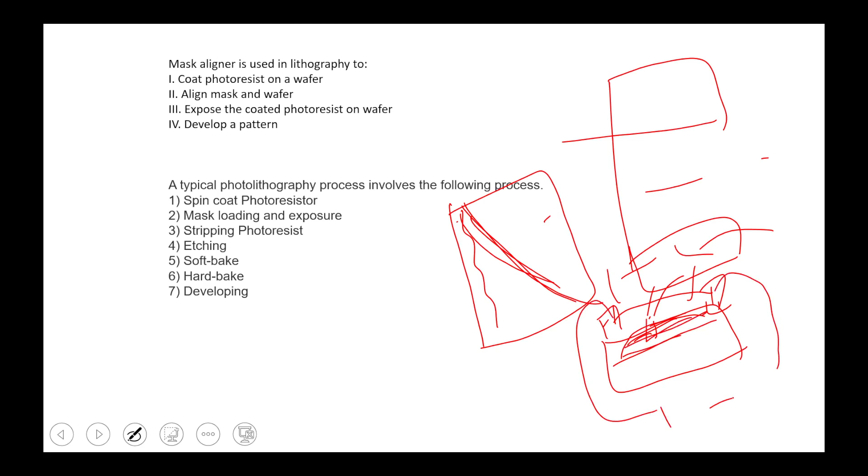We have two electrodes here, and when light falls on these channels, the electron and hole pair in the material will move through this channel and get collected on one path, an electric path, and we have to give the current like that. This is my characteristic, and without exposure my current is like that, suppose 10 nanoampere.

When light falls here on the material, my current will increase like that. It means the electron and hole pair moves from the valence band to conduction band, and it will saturate at one place. Then when we switch off the light, it will again come back to the baseline, same current as before.

What is the increment of current? Suppose this increment is 50 nanoampere here. So the difference, we have an increment of 40 nanoampere, this difference of current will be generated due to the absorption of light on the material.

Suppose the material reflects the light or transmits the light through the material. What happens is there will be some noise in that case, and the sensitivity of the device will be reduced.

So IR detector means it will detect the IR light, infrared light. How much, like that we have the silicon diode. Have you heard about the silicon diode?

Yes sir, photodiode, avalanche, Zener photodiode, APD diode, like that avalanche and Zener photodiode, or PIN photodiode, PIN or PNIN. So what will happen?

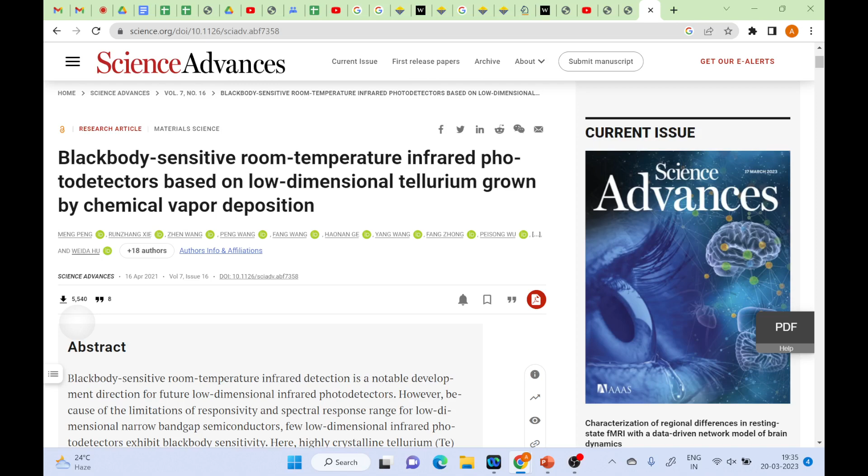See this paper. They have prepared a black body sensitive room temperature infrared photodetector based on low dimensional tellurium grown by chemical vapor deposition. They use the material tellurium, TE material, and here is the introduction. They have results like these materials.

This type of material we have to deposit using some deposition technique. We have to evaporate the material either by thermal, PCVD, LPCVD, MOCVD, or ALD. These are the machines and equipment used to deposit materials.

So if you are interested in MTech in nanoscience and nanotechnology, you can read more about this theoretically, about these machines, after BTech or for PhD. So see, this is the growth process - this is the machine used.

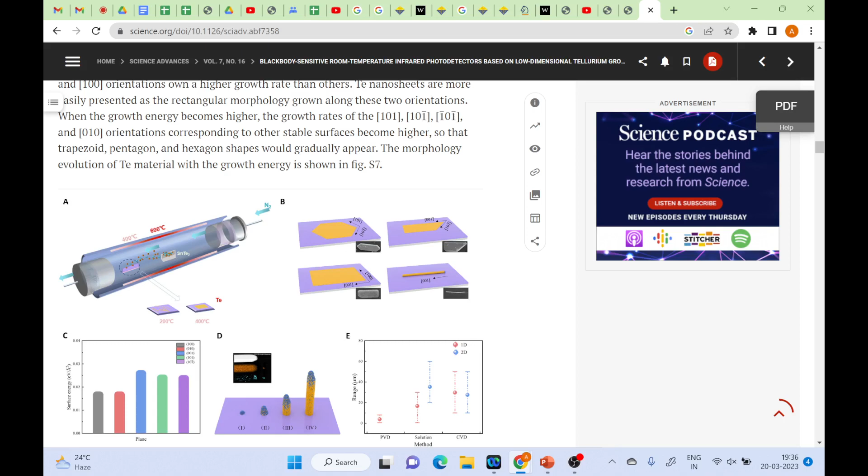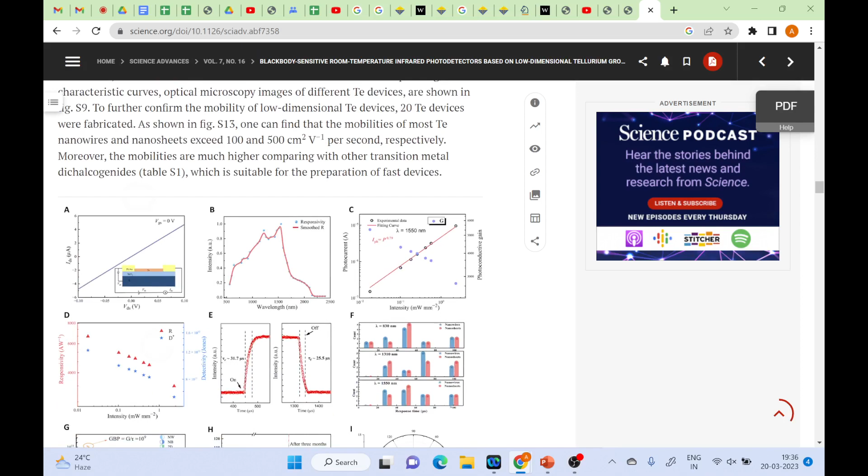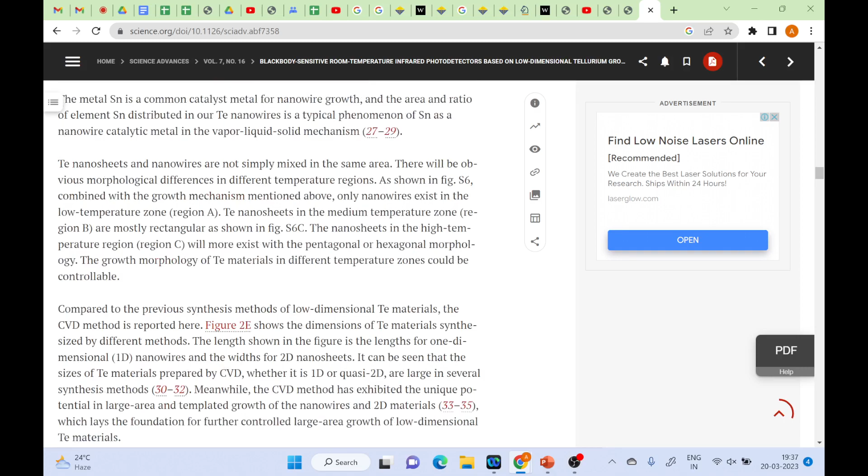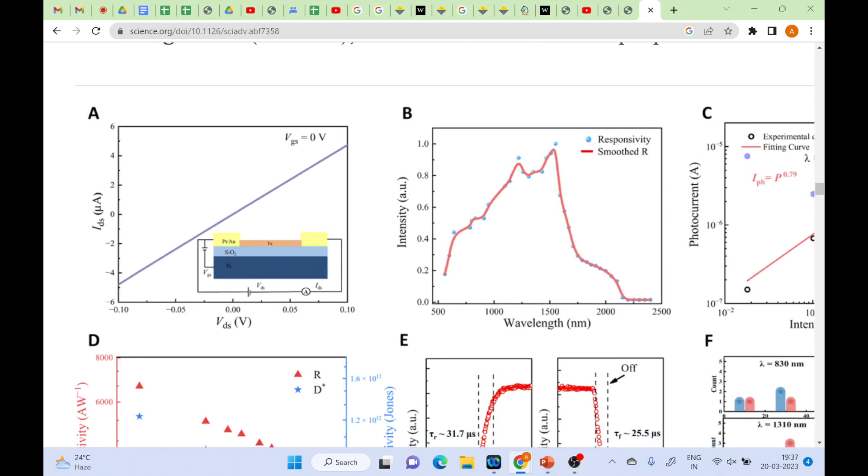See, is this diagram visible? Yes sir. This is silicon on which they deposited an oxide layer. This is platinum which they use as electrode, gold electrode. And this is the IV curve - VGS means gate to source voltage is 0 volt, they have not applied any potential, it's self bias.

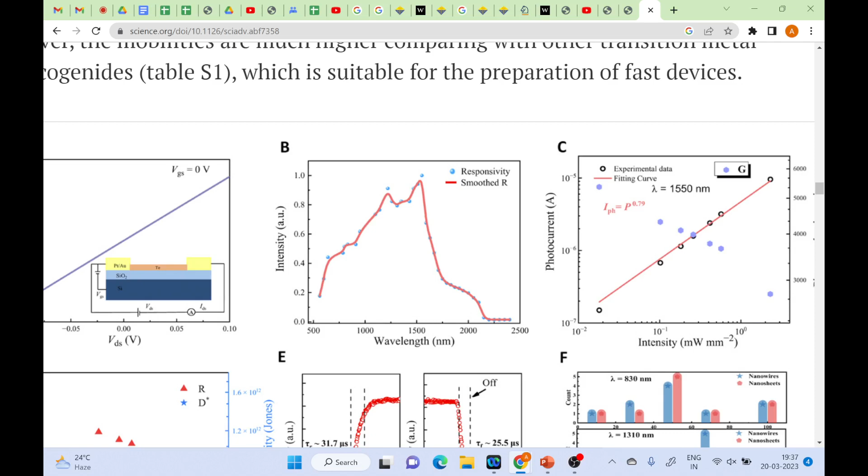And this is the sensitivity versus light wavelength - see, from 500 nanometer to 1250 nanometer, and it reaches maximum value at around 1500 nanometer. See, 1500 nanometer is IR light, near IR, 1550 nanometers. This graph shows photo current, how the current increases.

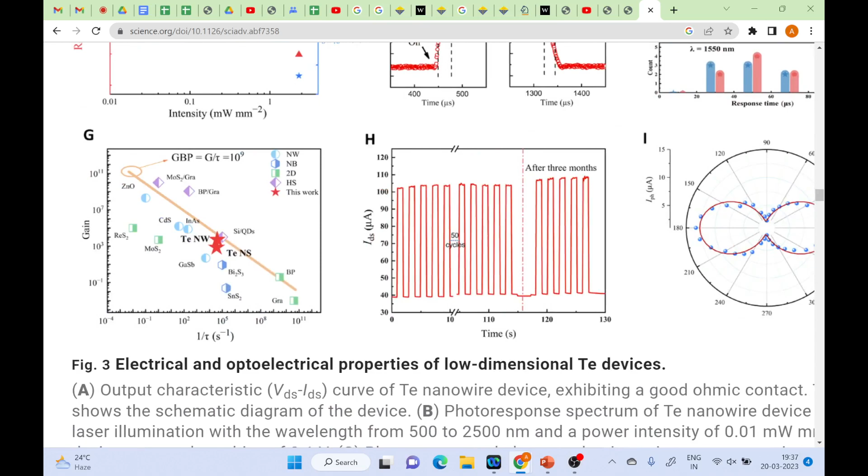Understand? Yes, sir, I can understand. That's why the question is right that black body is more sensitive for the IR case because their band gap is approximately in the same range.

So the sensor has the highest sensitivity when the target surface has more absorbance than reflectance. More absorption, not reflectance, because the sensor will absorb that light. When absorption happens, more electron-hole pairs will be generated. We require generating holes and electrons, otherwise current will not increase in that case.

Okay, any other doubt? No sir, you can start the session now. So can you answer these things if you read these two questions? Can you try? Sure, sir.

Mask aligner is used in lithography. Second one: it's used to align mask and wafer, and expose the coated photoresist wafer.

What is the mask aligner? So what is meant by coat photoresist on wafer? What is the meaning of that? It is used to develop a pattern, and photoresist is...

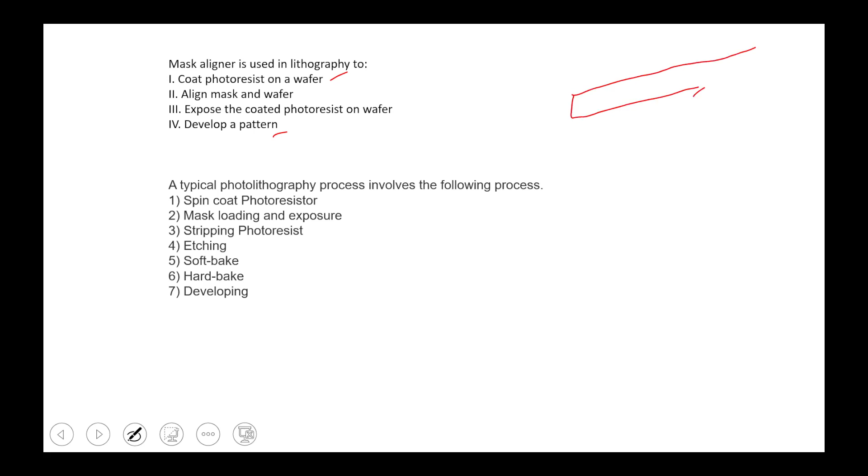Okay, like that, these are the design. You have to make one design. Like that you have to make this design, transfer it onto these materials, like silicon wafer. This design you have to print on some glass substrate. There is one mask that comes with this design already printed on some material, like glass or copper.

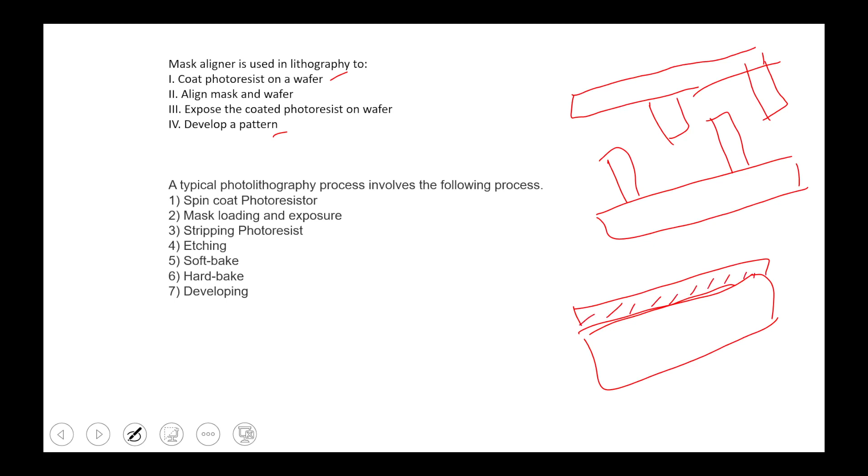Then in lithography you put this substrate and spin coat some photoresist, either positive or negative depending on your application. When you spin coat this photoresist, UV light will be exposed on this pattern, and you have to align that pattern.

Is it positive or negative, sir? It depends upon the application. In positive photoresist, the remaining part will not be exposed. This is the photoresist — I will explain this in the next slide also, with a schematic diagram of how this pattern will be transferred.

In case of positive, this type of light will be exposed here, and this type of pattern will be formed. In case of negative, if light is exposed here, this pattern forms and this part will be removed — the remaining photoresist will be removed. So it depends on your application whether you use positive or negative.

In case of the lift-off process, some people use negative photoresist. Lift off means you want to lift off some pattern from the upper surface. I will explain that in the next slide, everything.

So, next question — mask aligner is mainly used for aligning the mask with the pattern. There is some aligner, some alignment element. So mask aligner means we have to align — you have to print some design onto some material.

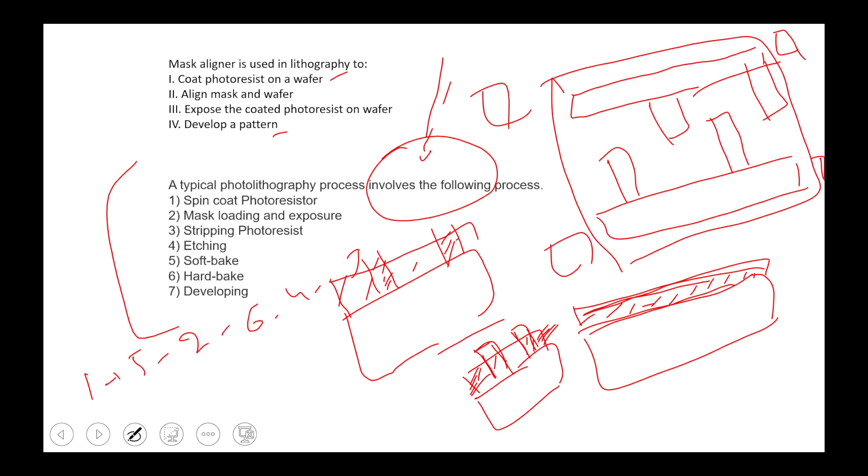Next question: in the fabrication process, acetone dip is done to remove what? It is for photoresist stripping, sir.

Yes, because whatever remaining photoresist is there after exposing, we do not want it, because it is non-conductive and covers our materials as one layer above them.

So the active area of the device will be reduced if there is any photoresist remaining, so we want to remove unwanted photoresist by etching in the presence of acetone.

We put our material in for 30 seconds or 10 seconds depending on the time period needed until it is completely removed.

What is the resolution of the 8-bit ADC working at a reference voltage of 3 volts? Sir, I calculated this using the formula 3 divided by 2 to the power of 8.

V reference minus... using this formula, have you remembered this formula from digital electronics for resolution of ADC and DAC?

ADC and DAC converters. V reference was already given and N is given as 8 bits. When you divide 3 by 2 to the power of 8 minus 1, that means 3 divided by 255, since 2 to the power 8 is 256, minus 1 is 255.

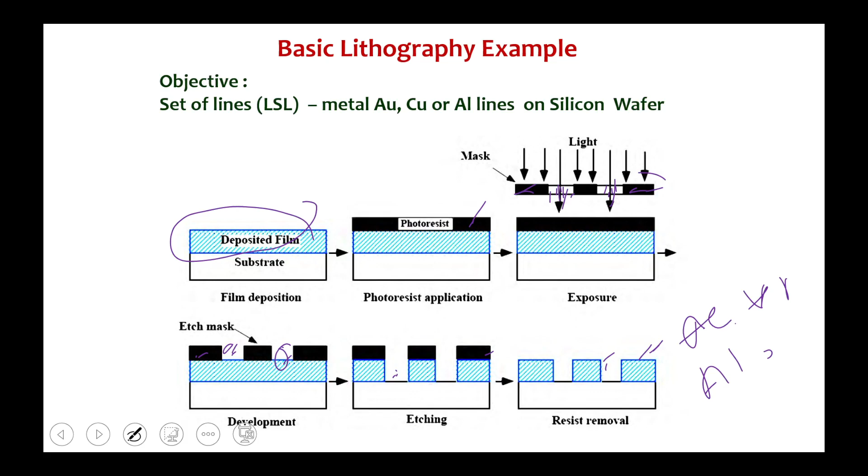Through acetone. Or, different agents - like if we use gold or silver or chrome or metal, we have to use a different agent which can remove the gold or silver. So as per the application we choose the agent available in the market, or we have to develop it ourselves by mixing hydrochloric acid, acetone, IPA and other materials to make our own solution to develop that design. So this is the positive and negative photoresist difference.

You can see that. So what will remain - in case of positive, this will be remaining. Sir, it's island and hole type.

Like that, especially bright field mask, we have to expose. So what will happen in case of positive? In negative, it will be removed, only this will be remaining. But in case of positive, this will remain and this will be removed.

Opposite - we have to do the opposite. So we want this to be safe. If we want to deposit some material, like deposit gold here, the whole gold will be deposited here, and this area will remain safe. And then after depositing gold, we can remove this positive photoresist by an acetone dip.

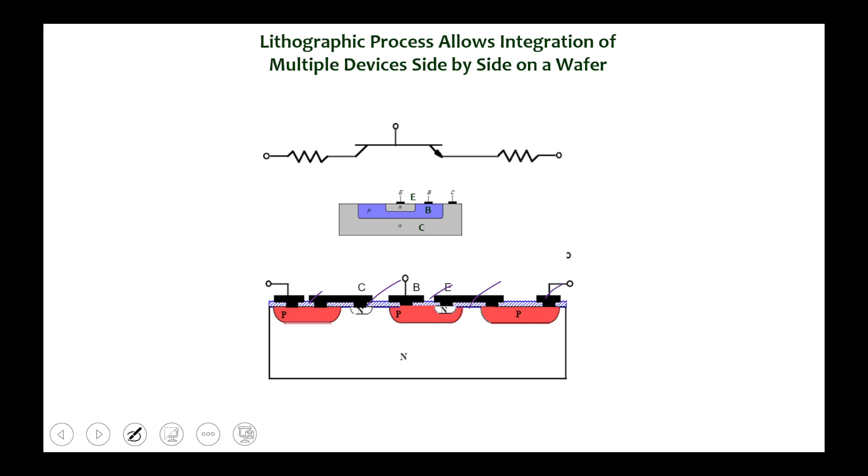So this is the circuit we have to fabricate through lithography. This collector, base, emitter, and electrode we have to deposit through lithography - this transistor.

So this is the process sequence in lithography. The surface of the silicon wafer has been oxidized to form a film of SiO2, because we need the insulator - SiO2 is the insulator, the oxide layer. So we have to deposit the insulator. It is desired to remove the SiO2 film in certain regions as defined by the mask. So where we do not want SiO2, we can remove it through the etchant - like HF solution is used to remove SiO2.

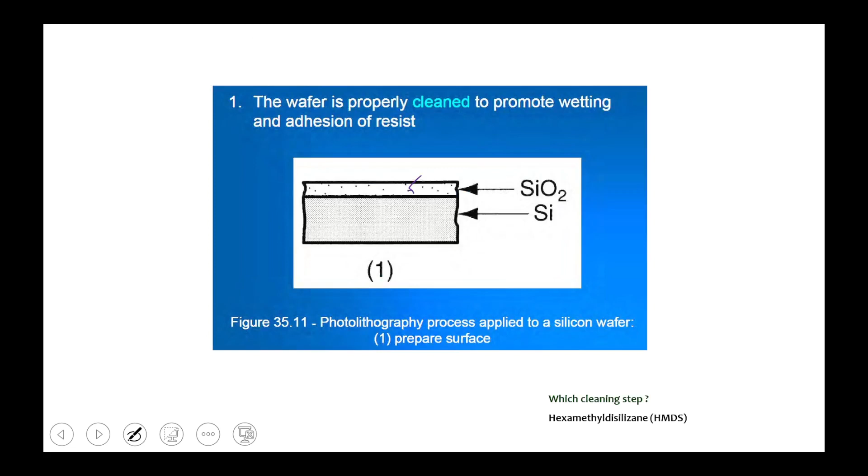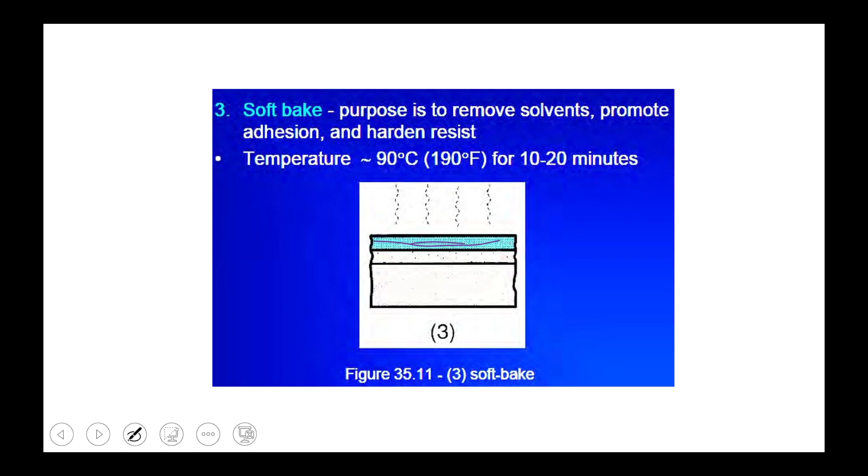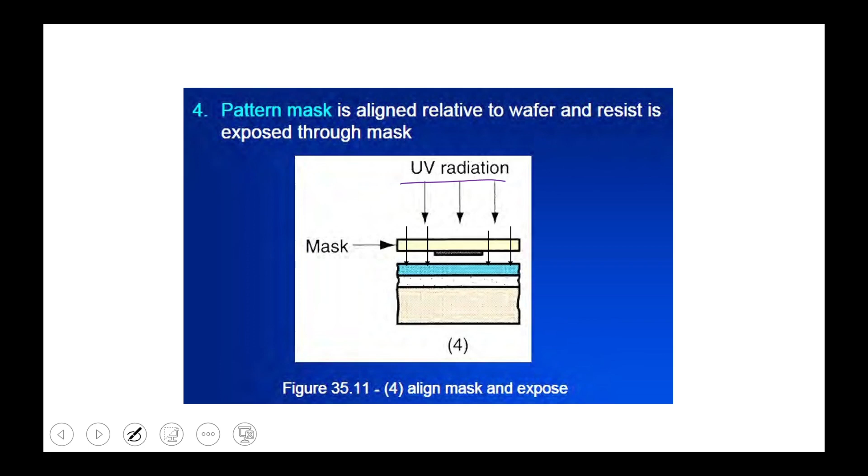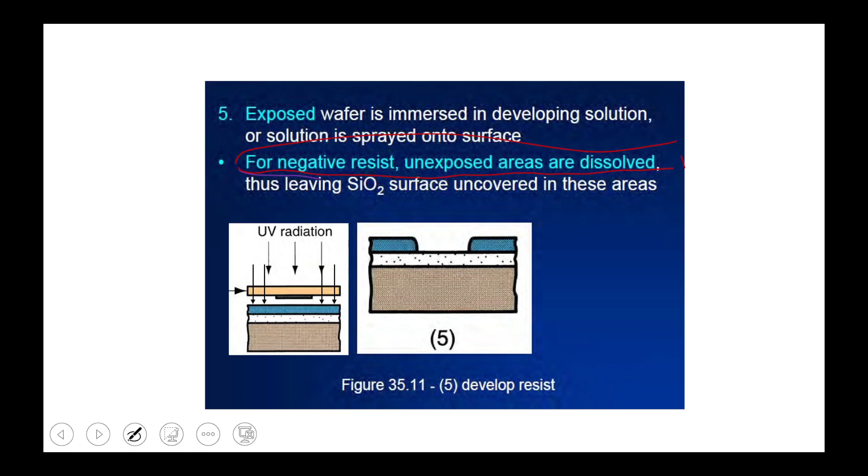Then we do the pattern of the mask here with UV radiation - we use UV light, maybe 365 nanometer, 395, or 350 nanometer, whatever lamp is available. And then this mask pattern is exposed. For negative resist, for 1 minute, unexposed areas are dissolved. But in case of the positive, exposed areas will be dissolved more strongly. This is the hard bake - after that we have to do everything. We do the hard bake for dissolution.

And then we have to add the SiO2 layer - so we have SiO2. To develop the photoresist, for hard baking, we use a developing solution and increase the adhesion of the resist. This remaining photoresist - so to make it react with the light also, UV light.

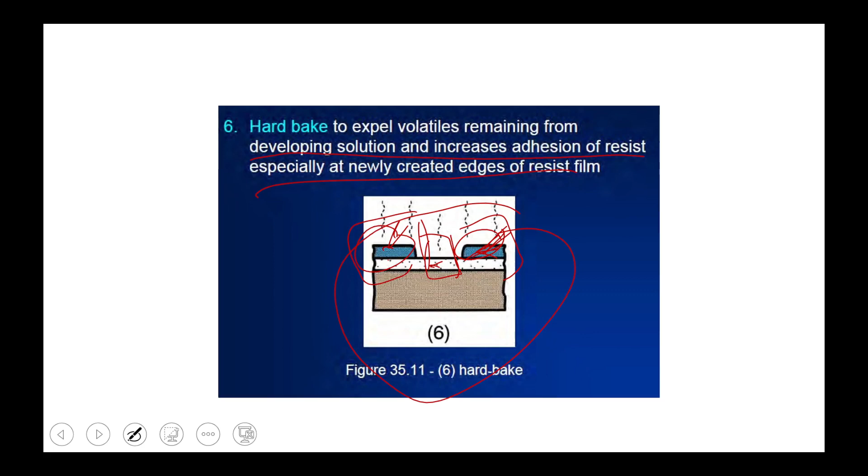So it will be softer in that case because UV light will break that material. So what if we don't do the hard bake? It will be removed in the solution also. So we do not want to remove this - we want to remove this at the last step. Before that, we want to remove this window, this silicon oxide layer. So it will be removed through the etchant.

And then resist coating - then we have to remove this resist. Otherwise, what will happen if there is no resist, is that when we do the etching, the whole oxide will also be removed.

So we do the hard baking in that case also. Understood? Yes sir. Sir, I have a doubt, sir. Does annealing take a part in photolithography?

Annealing and pattern, sir? So hard bake is the same as annealing. People using hard bake means we do the annealing. Means annealing and hard bake, hard bake is just the name, but we can use annealing. We use that in some other process during material deposition, we do the annealing, calling it annealing. But in case of lithography, we say that is the hard bake and soft bake.

But we use the temperature, presence of temperature only. We have one hot plate instrument, there is a thermocouple, thermometer in that hot plate. We increase the temperature, which may be digital or analog, and we set the temperature around 100, 300, 400 degrees Celsius. We put our substrate on that plate and keep it for around 10 to 20 minutes. So to keep it in lithography terms, we call it hard bake and soft bake, and people also call it annealing. You can say both names are the same, both things are the same.

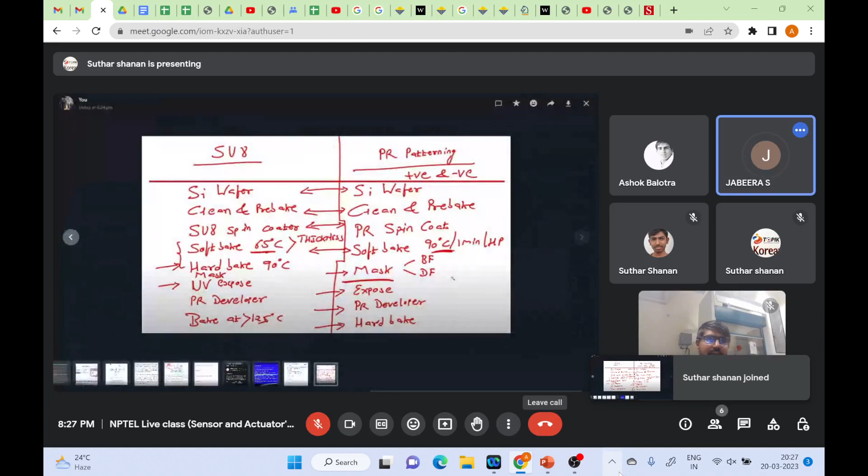So here I have a doubt sir, in SU8 fabrication, after soft bake they used hard bake sir. What does that mean sir? He had explained something sir but I couldn't figure it out - the difference between the general positive and negative photoresist and with the SU8, sir.

Okay, so after that soft bake, they immediately do the hard bake. So where did you take this from? It's from our lecture video sir, NPTEL, week 4. Let me show the lecture number sir - week 4, lecture number 2.

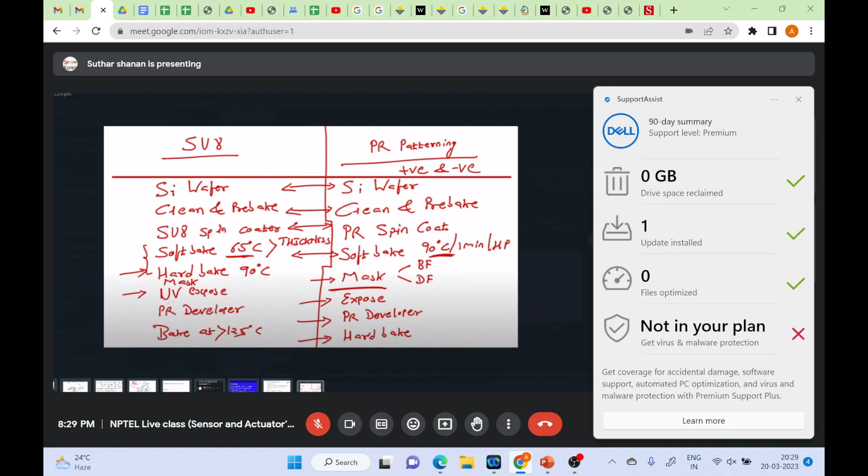Next one, photoresist developer. Next, hard bake. My net is not working.

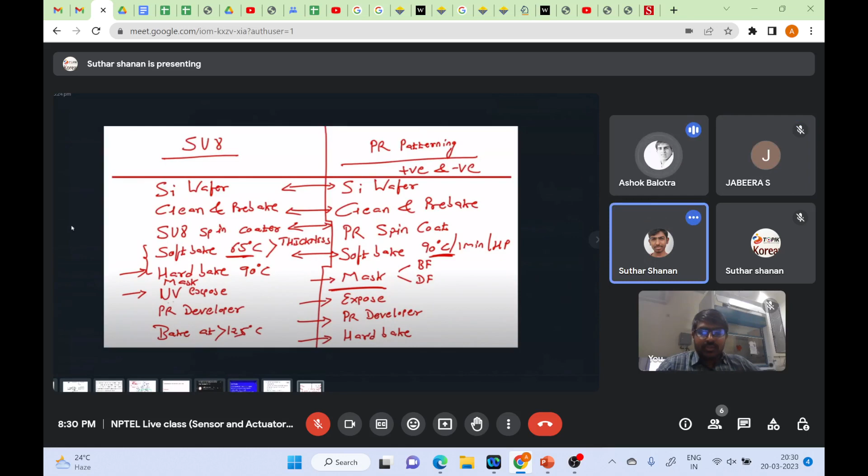Right, so this is the photoresist. Maybe I have included in this slide also SU8 or that - can you stop that, maybe in my slide it will be there. Okay sir, okay, I will stop. Okay yeah, you will stop that, maybe in my slide it will be there also.

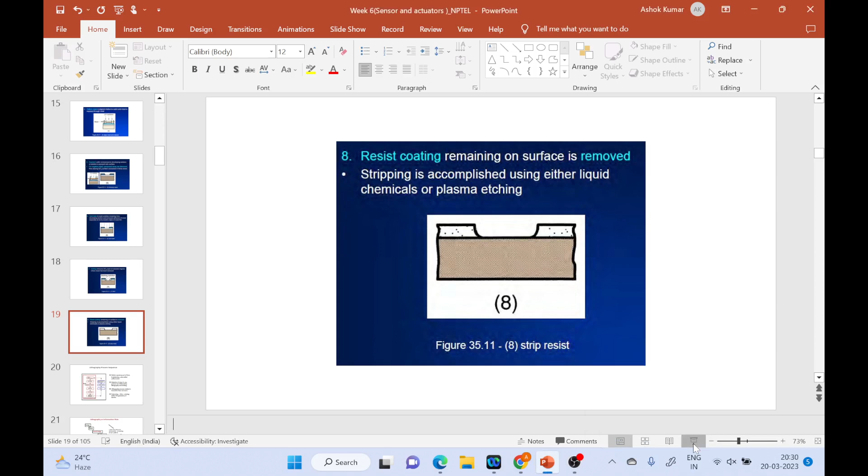I have maybe explained the photoresist also first, 1 minute, see that.

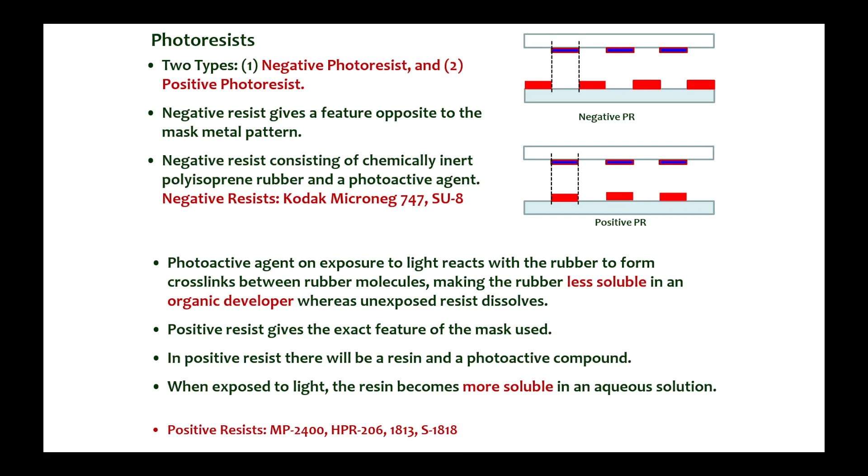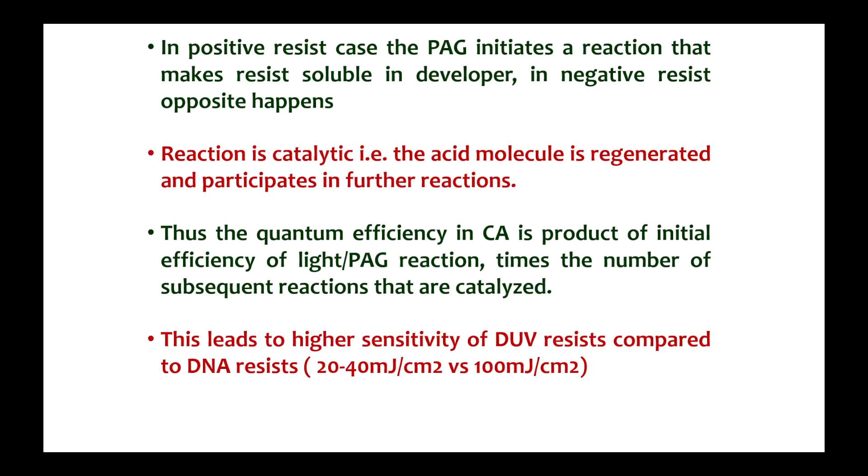SU8 is soluble. Sir, in SU8, after soft bake, you directly go to hard bake, right? Yes, but why? Give me one minute, I'll provide a reason for why they are using this.

Maybe I have explained about the soft bake and post bake in the 4th class also this week.

Okay sir, yes sir, can I ask you a question sir? So there are three basic components of photoresist sir. Yes, they are resin and sensitizer, and one more is solvent.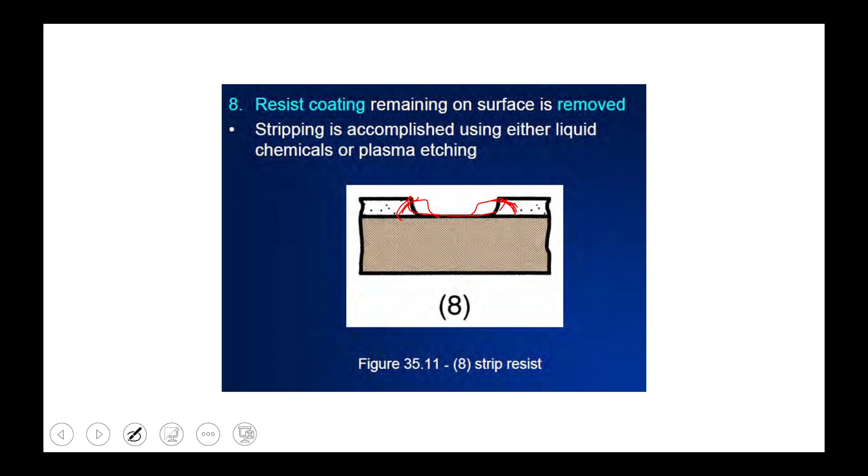We can check over-developing and under-developing through the microscope, or we use SEM or FeSEM. SEM is scanning electron microscopy, and FeSEM is field emission scanning electron microscopy. These are the characterization equipment we use to inspect our devices and materials. Through the optical microscope we can see at nanometer resolution whether our device is developed or not, and whether it is properly or improperly developed.

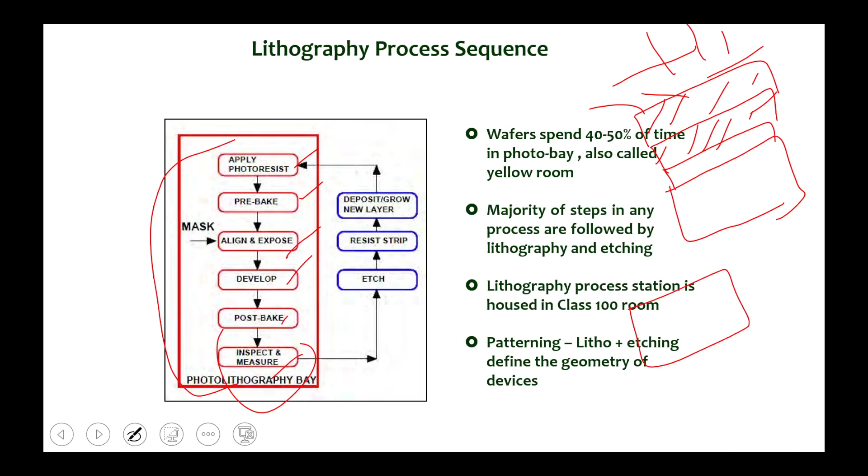In our case, what do we have to do? We first deposit some material, then we have to do the coating of gold, chrome or aluminum. This is the chrome, then above that we develop the photoresist, then we expose the material, and then we do the etching and developing each time. But some people, in case of UV and EBL, use the photoresist material and transfer the pattern, and after that deposit the material aluminum, chrome and gold on it, and then remove the unwanted photoresist material through acetone. So it depends upon the machine and availability of the device facility we have to use.

Okay, so that's why, yes sir, this process will be changed in that case also.

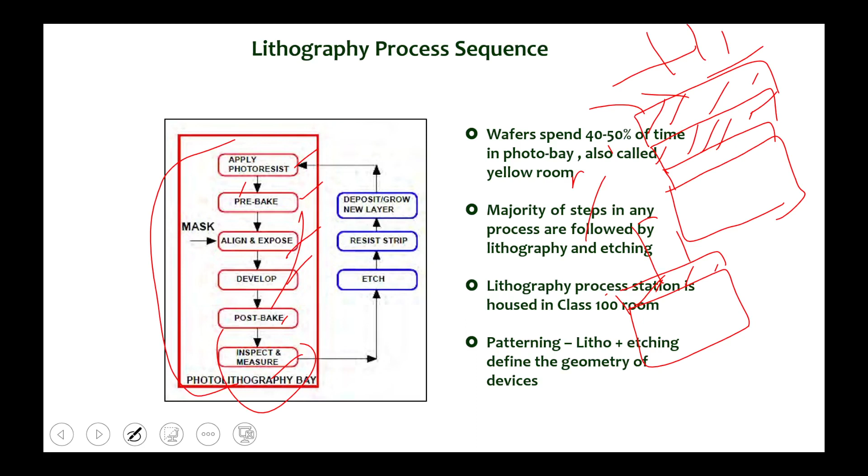This may not be directly helpful for this lecture or exam, but when you go for post-graduation and PhD, it will be helpful in that data too. I am explaining in more detail beyond the lecture scope. The textbooks just explain the basic principle of photolithography, positive and negative resists, for your basic knowledge, but I will go into more depth.

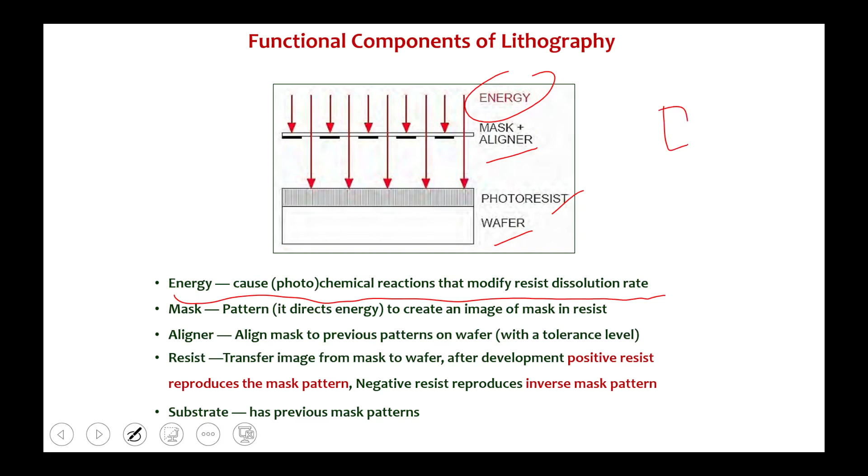The mask aligner is used to transfer the pattern image onto the resist. We have the aligner, which I will explain in the next PPT also. These types of aligners are used, and in between we have to transfer our design.

So we have to set the scale so the design is properly transferred onto the material. We use four alignment points here - this is the boundary of our device - and within that boundary we transfer the design. Like if we have a plot, we make four corners of the plot, and in between we design to fabricate our house. First we make the four blocks, measure the distance to the middle, and then make our design. The same thing happens in the case of photolithography.

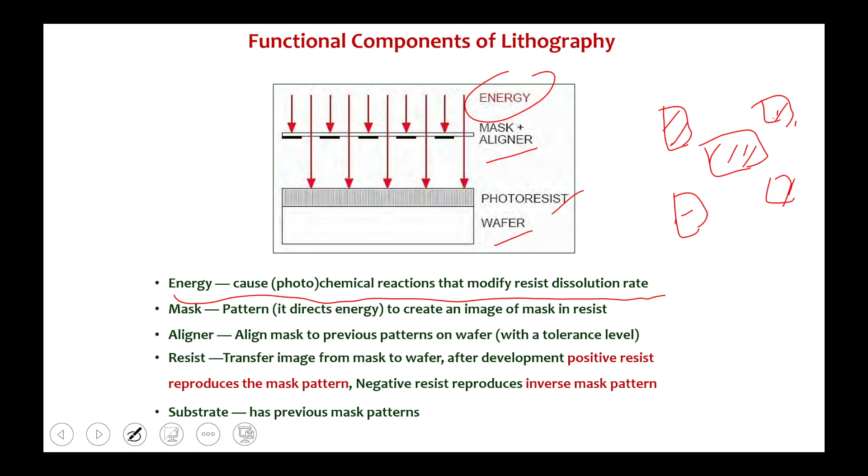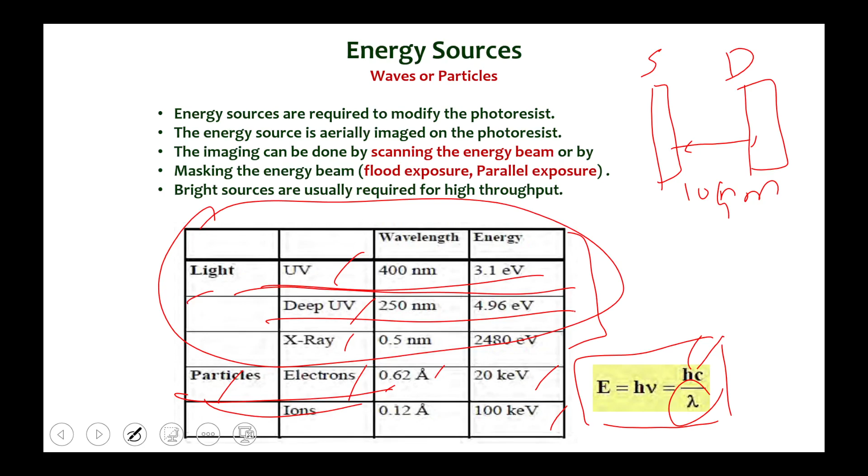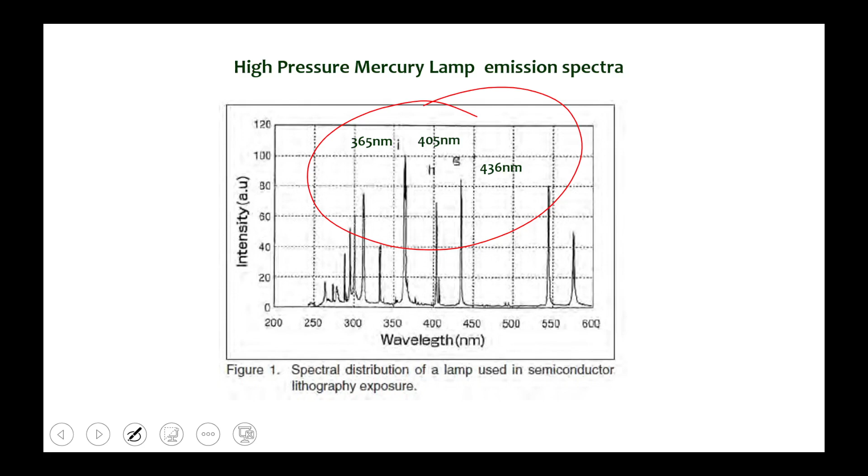This is the mercury lamp wavelength that we have used. This is the class of light. Some people use the mercury arc lamp, some use the excimer laser. This is the wavelength range - some use ultraviolet, some use deep ultraviolet at 248, 193, and 157 nanometers, and vacuum ultraviolet lamp.

I think you were not present in that class where I explained the effect of UV - sterilization and everything. Before that class, I explained the role of UV light in the clean room, UV sterilization, and lithography - how it will be harmful for human beings.

Sir, it causes cancer. Yes, that's why skin needs to be covered. When we go to fabricate devices, we have to wear an apron, proper eyeglasses, proper gloves - our skin has to be covered. Everything we have to take care of when doing lithography.

Even this is done in vacuum space - in the vacuum we also do the same. In the lab session we have seen only hands get into those closed areas, and the hands are covered with gloves that protect from the UV light.

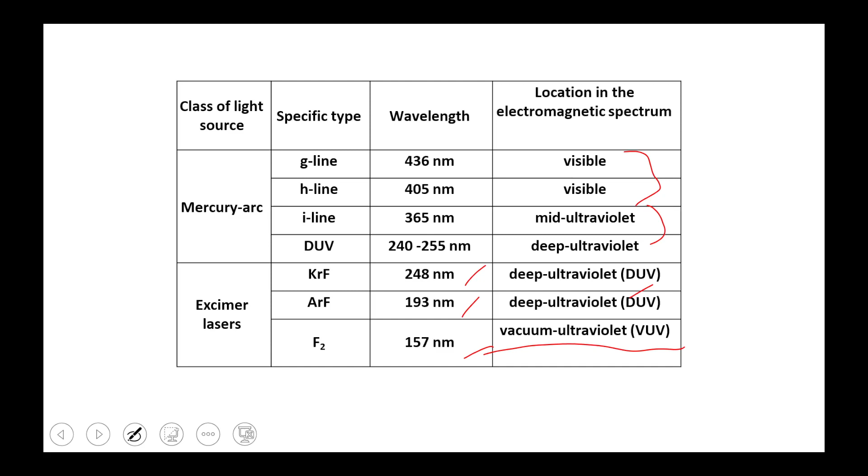This is the light source. We have one arc lamp, a xenon lamp here. This is the mirror, this is the filter that filters the particular light, because the xenon lamp has the whole spectrum of light covering from 100 nanometer to 2500 nanometer. But suppose we want 365 nanometer, so we use a filter that transmits only the 365 nanometer light and reflects the other light. Then we have the lens assembly - this light will be focused on the lens, and then we expose it through the mask.

Like that we have the arc lamp - this light spectrum here. Then we use the filter that transmits only the 365 nanometer, and then there is a mirror, because it will split in many directions and we want to make it coherent in only one place. So we use the mirror so the light, which is in many directions, comes together and spots on one place. Then through the lens assembly we can focus on that one spot.

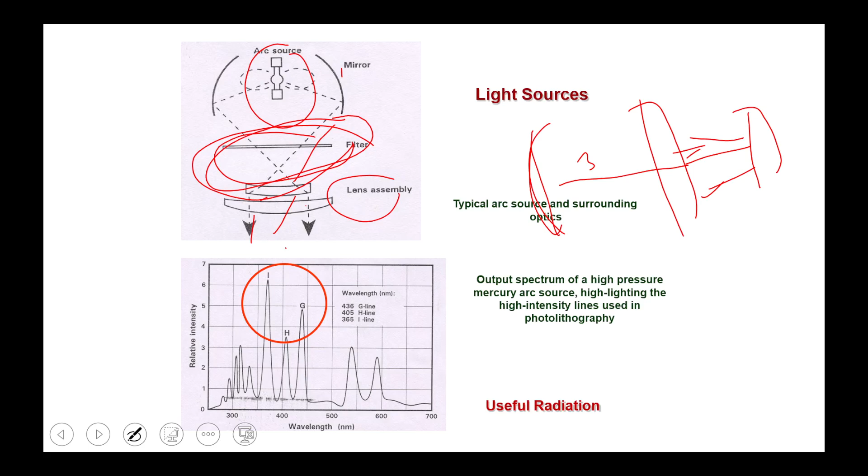Any doubt? No, sir, no, sir.

This is extreme ultraviolet lithography, EUV, the next generation lithography technology. In this we use a wavelength of 13.5 nanometers of light, and it has a feature size of 15 to 16 nanometer devices that can be fabricated. During the 7 nanometer process node, in the 7 nanometer technology, we use extreme ultraviolet lithography to fabricate devices.

Yes sir, more resolution, sir. Yeah.

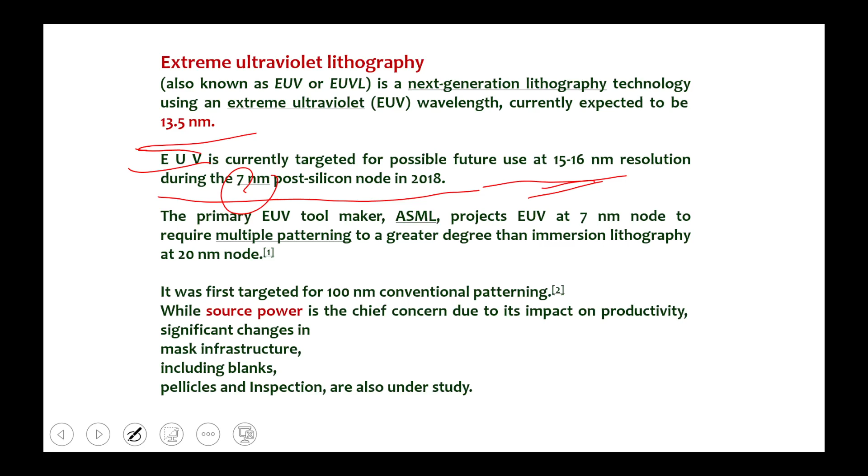So for this type of mask, we use an 800 angstrom chromium layer on the glass substrate, to block radiation where it is not wanted and absorb radiation. That means where we want this to be blocked, this is the black color - we don't want to transmit that radiation, we want to absorb it. So that's why this is black color. It will be absorbed there, and it will be transmitted through this transparent part.

So this will not be exposed. It means it will be absorbed at the block, and not transmitted, meaning the photoresist will not be exposed to light in that place - it is covered. So we need an opaque material at the desired wavelength. This opaque material blocks where maximum light would otherwise transmit, where we use the opaque material, sometimes semi-transparent material.

And this is photoresist, this is chrome, and this is quartz. We have to deposit the chrome here as material. So photographic emulsion on the sodalime glass, which is the cheapest and outdated option.

Sodalime glass means normal glass. Have you seen that normal glass slide in your BTech or MTech chemistry lab? In the first year, you are given some slide like this size, a small glass slide. So previously we used glass also as a substrate to fabricate devices because it is very cheap and easily available in the market. The cost is not so much.

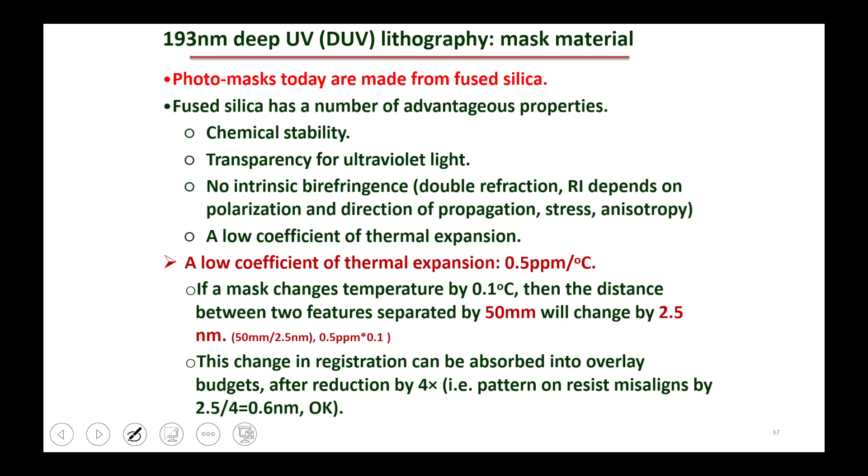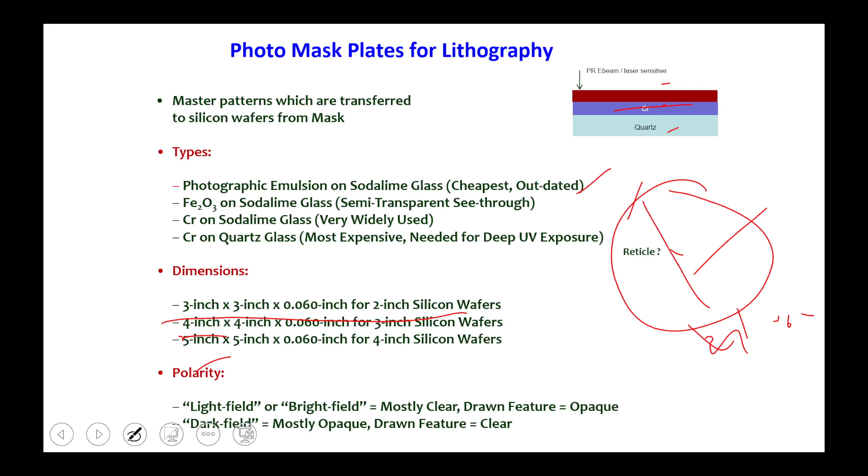So we use different dimensions of silicon wafer - 3-inch, 4-inch, 5-inch - and the yield of the silicon wafer differs. It depends upon the type of the plane and the direction of the planes, what type of silicon wafer you use. It depends upon the planes - either it is 100 type, 110 type, or 111 type. It depends upon what type of silicon wafer you use, upon the orientation of the silicon.

And why do we have a flat primary side? To identify - this is the silicon wafer, we have one primary flat here and one secondary flat here. So it will be like that: if this type of angle is zero, then this is 100 type. This is to identify what kind of wafer, to identify the type of orientation, which wafer you have used. Otherwise it has no meaning.

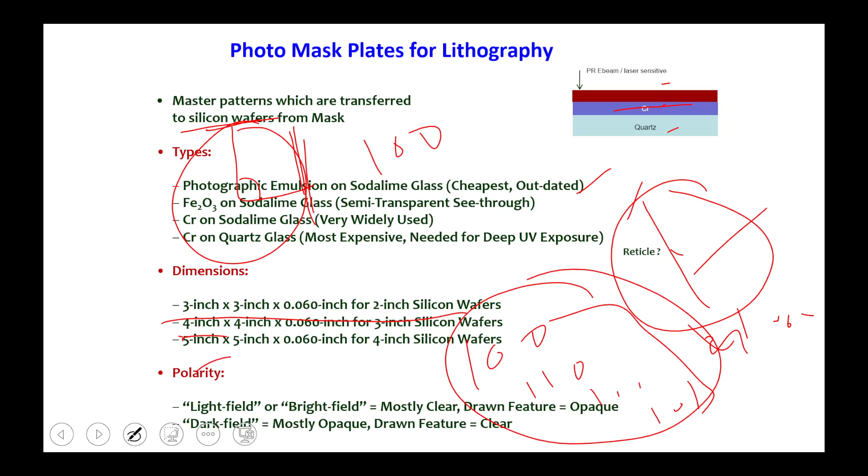So if someone gives you a wafer, and I ask you what is the type of the wafer, you can identify whether it is P type or N type, and what is the orientation of that wafer. People can identify through the flat type, or else you have to do XRD - X-ray diffraction, a technique used to identify the type of material, like silicon. XRD is very costly, not available everywhere. So from the whole 2-inch wafer, you can identify what type of wafer you got from the vendor. You can use these things also.

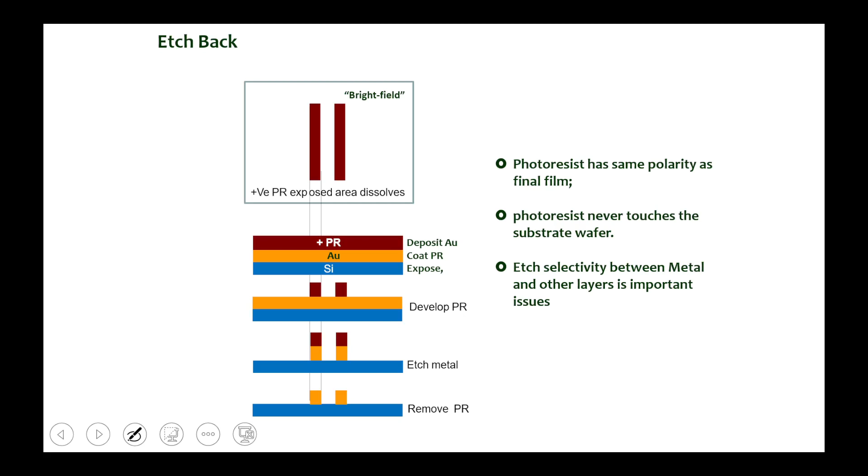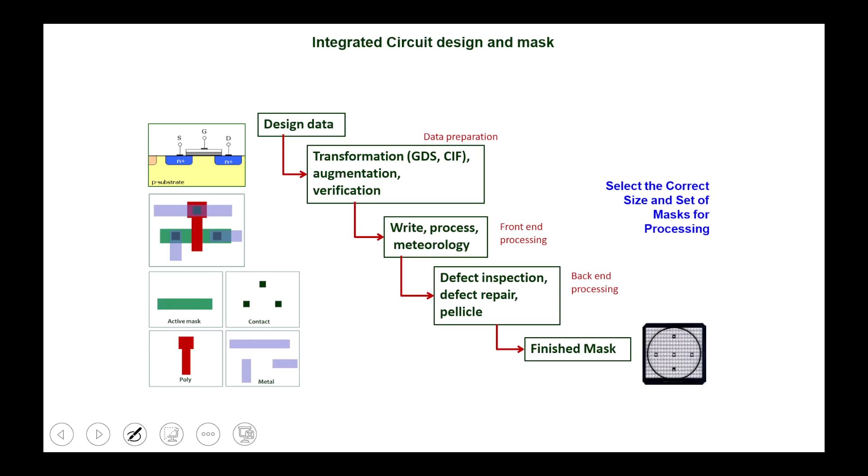This is the layers. This is how the mask is fabricated. This is the tool L-edit. So we have to make your devices in the L-edit tool.

Whatever design we have, we have to want to transfer that for mask creation. Yes, we want to create the mask with this.

So this is the mask, and this is not for you. This type of lithography, the whole machine will become this.

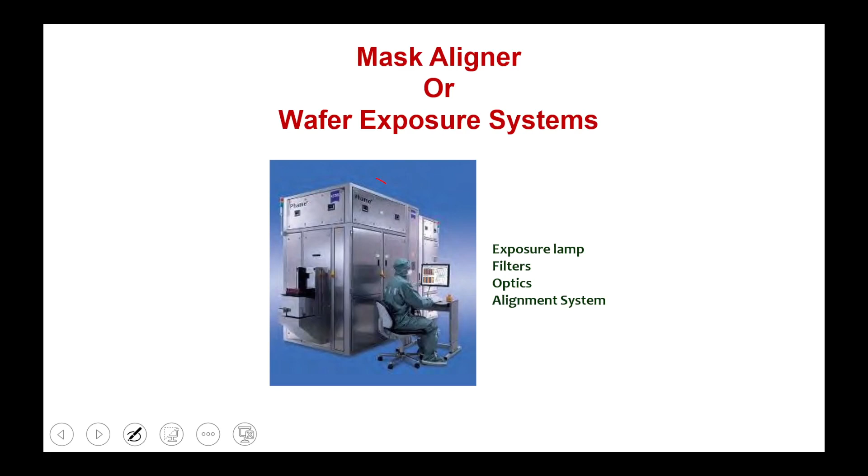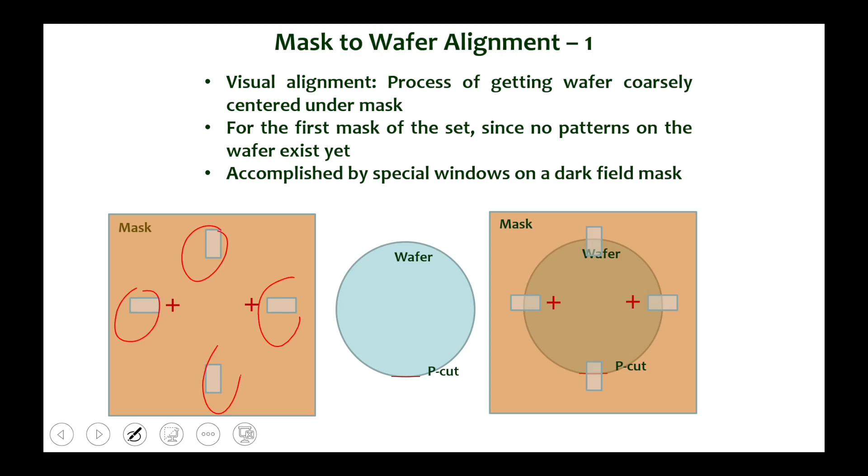This is the alignment we have used. This is the wafer, and we have to align this for wafer. Peak there, see that.

This is the mask aligner alignment, see that. This is the mask alignment that will be there. These tools, and we have to make the devices using these.

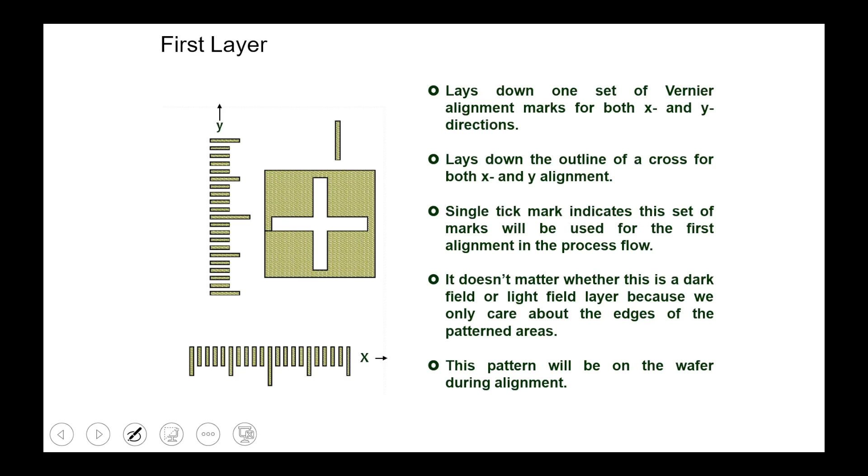See that, this is the first layer. Then we want to transfer the second layer. Then we have to again make the alignment of the second layer. So we identify that position of the alignment. We have to put the first alignment.

So if we want to do the second lithography, first we have to make the source, then we want to deposit the gate above that. Then we have to align that gate aligner with that below aligner also, to the position. So we want to remember that position also, otherwise that gate will maybe be deposited above the source and drain also, if you do not properly make align that mask. So that's why we use the aligner.

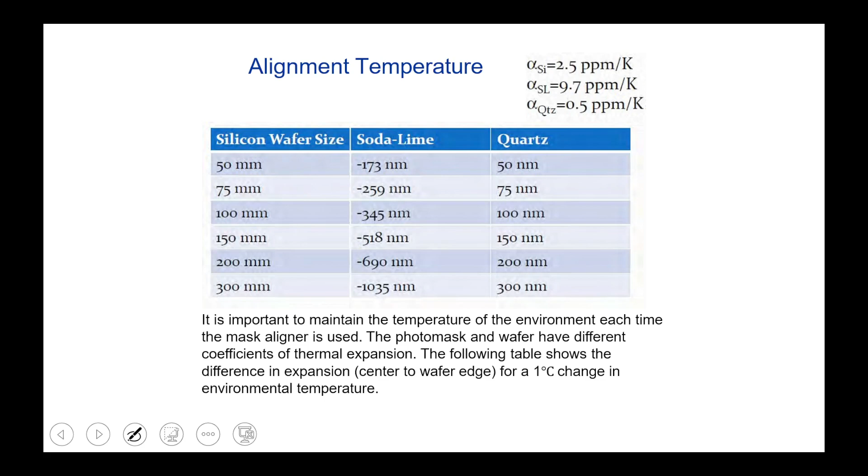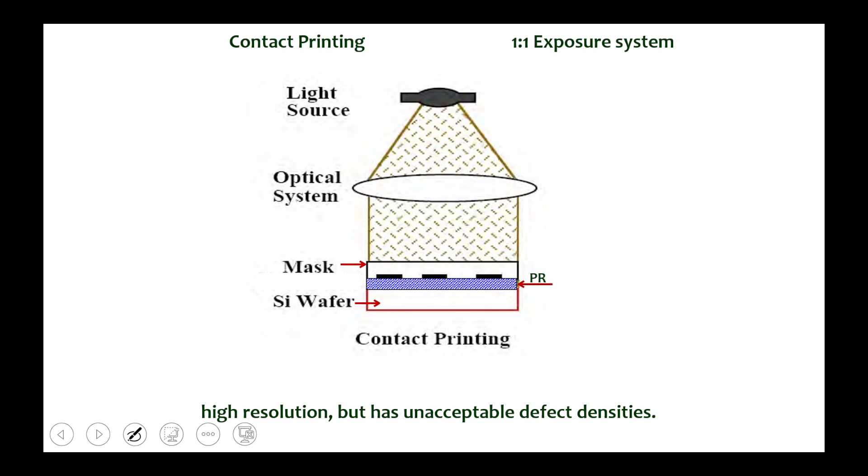Maybe I will explain that this is the wafer stage, this whole machine will be there. This is the mercury lamp they have put. This laser will go through that. There are some projector lenses that will be there, to project the light here.

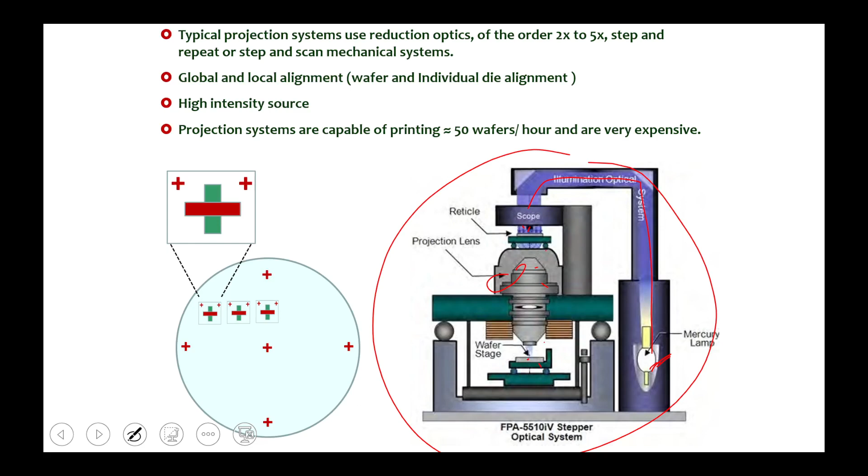Tell me, any doubt? No sir, it was a glitch. So this type of machine will be there. This is a lithography schematic diagram.

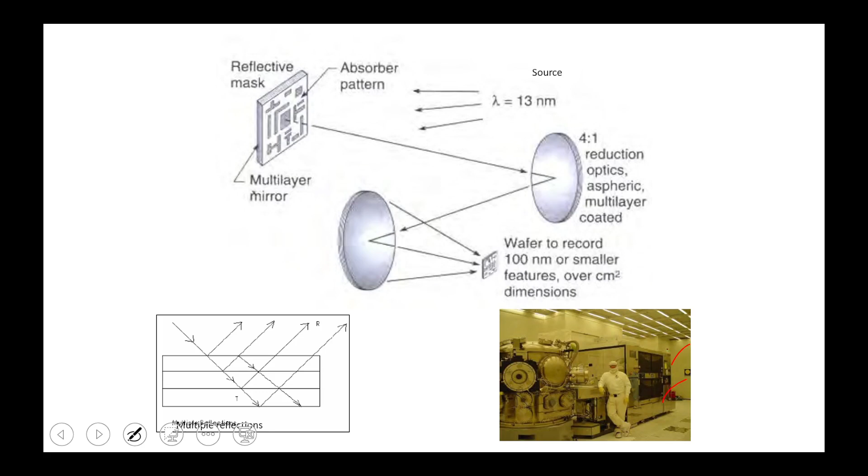Maybe I will explain, if you are available in the next class, this is the clean room, how people are wearing that equipment. There were many videos, sir, regarding the clean room and all.

So can you, we will stop here. Should I stop or should I continue?

Sir, I have a final question about the components of photoresist: resin, solvent, and sensitizer. What is the working and what's the purpose of these components? That's what I want to know, sir.

So are you in third year or final year? Third year, sir. So what is your future plan? Sir, I want to go to IITs for masters. So you are preparing for GATE. Yes sir, we had attempted this year. What is the rank? Not qualified, sir, not qualified. I had attended for EE. He was attending for EC, sir.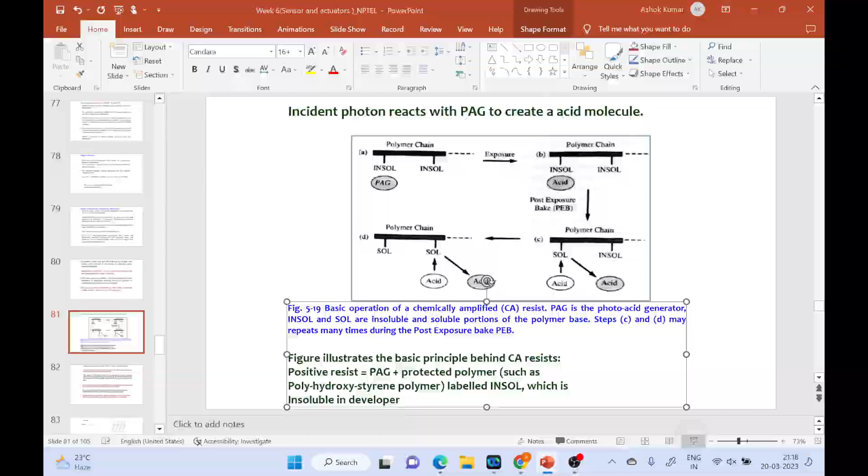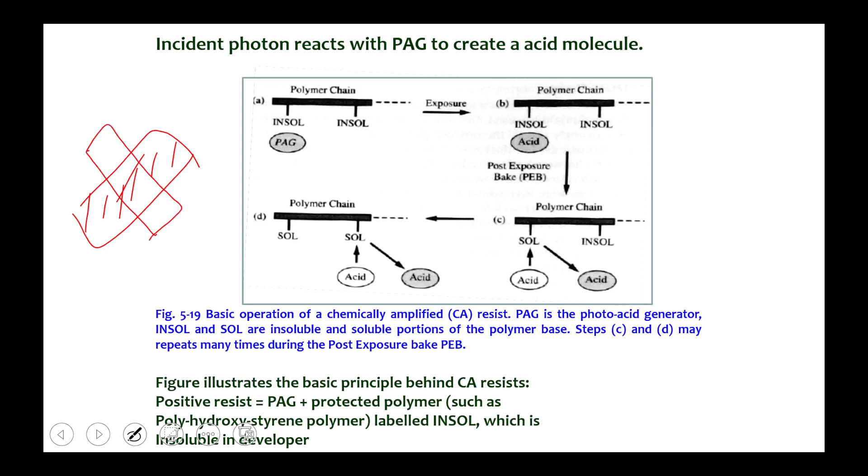Okay, like that, you want to remove the gold. You have to deposit your gold layer here. This type of gold will remain, and this I don't want.

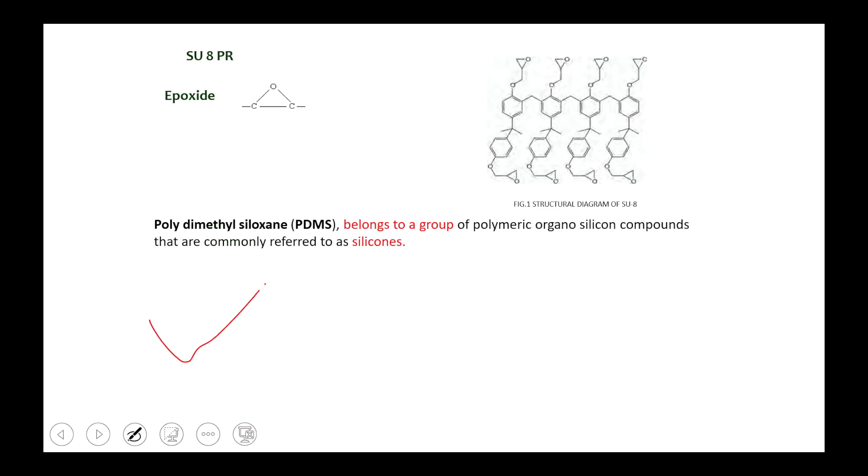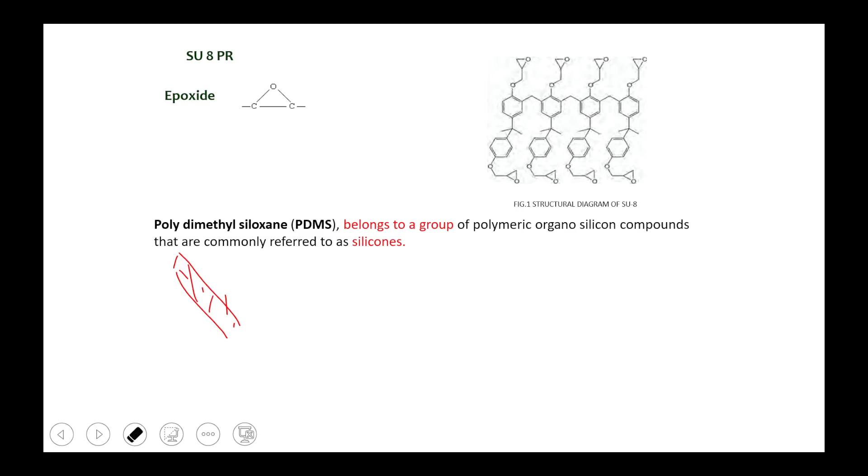Meaning this portion of gold you want to remove, and this will remain, and this should be erased. So you use the particular solvent so that this unwanted gold will be removed. There will be a gold solvent. Some people mix ethanol, some mix gold solvent to make that remover, acetone, HF - these are different solvents available in the market.

Sanitizer means when you want to dry that things, so either you have to sanitize at a temperature, either sanitize it with UV light, or you have to blow pure nitrogen or argon on that material.

So you want to dry, and you have to remove that unwanted remaining impurity available on that sample.

When you go through the clean room, people are blowing some air on their samples, or some use a hand blower, like that, pushing the hand blower. Have you ever opened your laptop in any repair shop?

No, sir. How do you clean the dust on a laptop? I don't know. If dust is on the laptop or critical parts of your devices, and you touch it with your hand or any cloth, that will destroy that part.

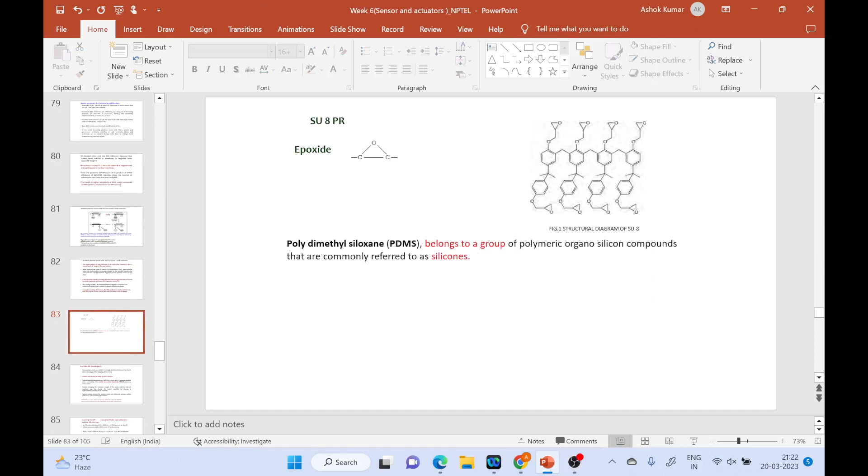Oh, sure, sir. We will join, sir. Interesting.